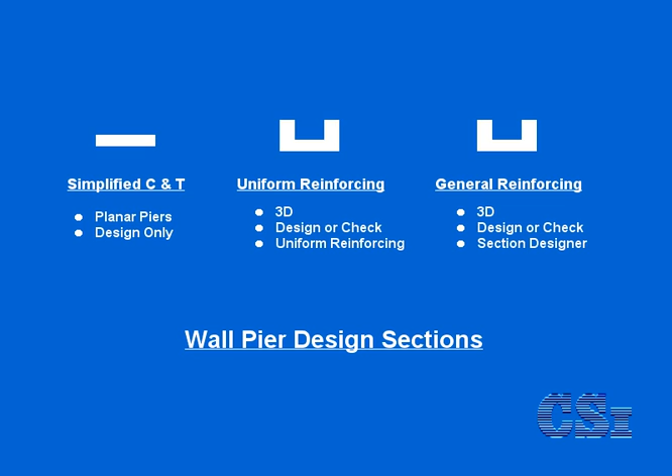This tutorial will illustrate the three types of shear wall design available in ETABS. First is the simplified compression and tension design, which designs planar walls. Next is the uniform reinforcing approach, which can design or check 3D walls using uniform reinforcing patterns. Last is the general reinforcing option, which can design or check 3D walls using arbitrary reinforcing patterns defined in the Section Designer program.

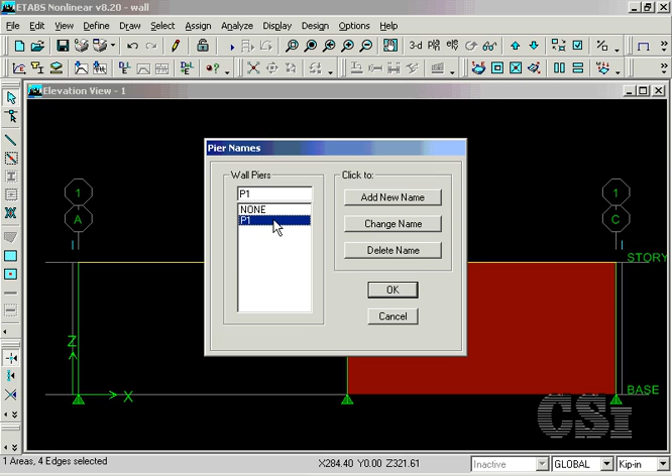The shear wall we will design is 1 story tall and 10 inches thick. However, before a wall can be designed, it must be assigned a pier label. Select the wall and go to the Assign Shell Pier Label command and assign a label. We can now run the analysis.

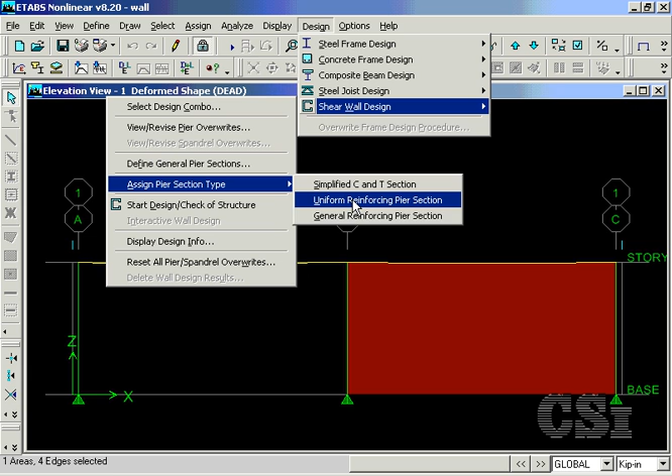With the analysis complete, we are ready to start the design. Select the wall and go to the Design, Shear Wall Design command. Next, go to the Assign Pier Section option. Here is where we select which of the three types of wall designs to assign. We will start with the simplified C&T approach.

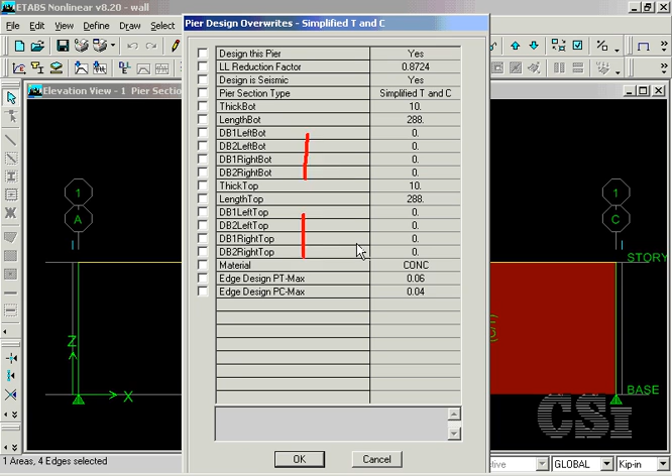Select the wall again and go to the View, Revise Overwrites command to verify our design parameters. Note the T&C is selected, that the wall is 10 inches thick, and if we wanted to, we could define edge members using the DB dimensions at both the left and right sides, top and bottom. We are now ready to start the design.

The required tension reinforcing is displayed on the wall. A right click brings up a detailed design sheet showing flexural, shear, and boundary check information.

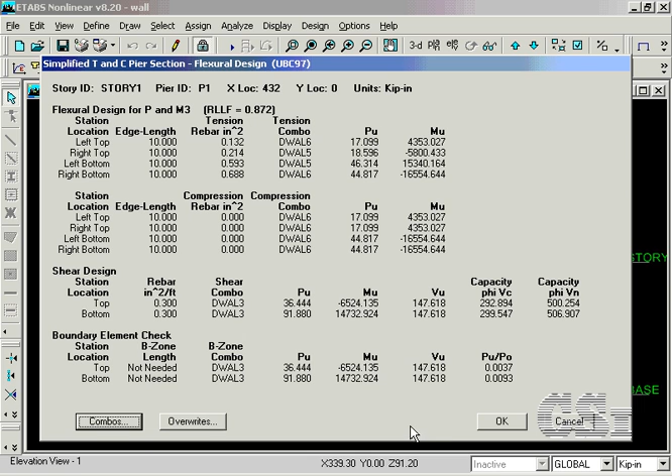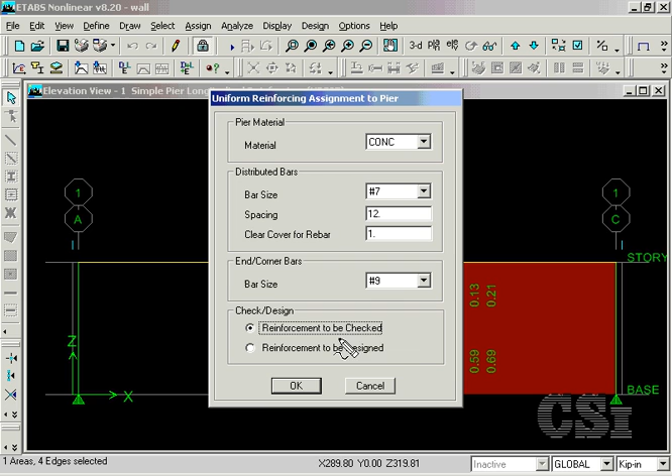Select the wall once more and again go back to the Assign Pier Section command, but this time select the Uniform Reinforcing option. In the edit box, you can specify the uniform reinforcing and the end bars, as well as whether the wall should be checked or designed. We will select the checked option, and the specified reinforcing displays on the wall, including the C in parentheses to denote check.

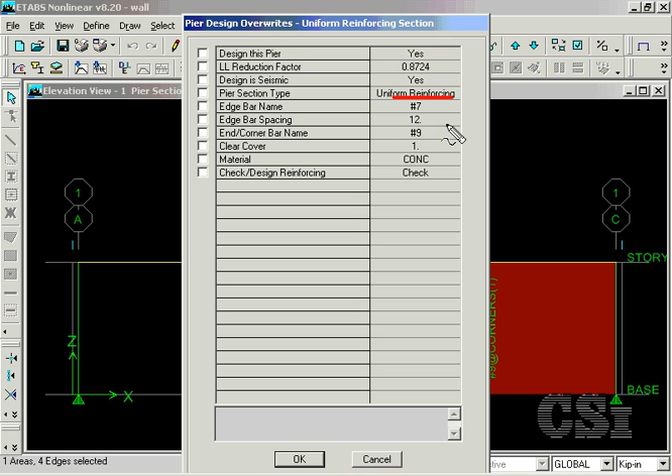If we go back to the View Revise Overwrites command, this time the box displays uniform reinforcing as the type, the reinforcing we selected, and that it is a check. Next, we rerun the Design Check command. This time, when the check is complete, rather than reinforcing, it is the demand capacity ratios that are displayed on the wall. A right click brings up detailed information on the check.

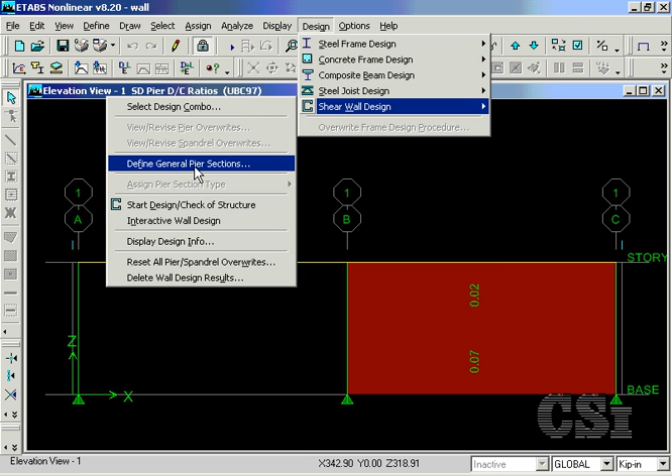Next, we will use the General Reinforcing option. However, prior to assigning this type, we must define the section using Section Designer. This is done through the Define General Pier Sections command. We will add a new pier section, but we will base it on the existing P1 wall pier geometry.

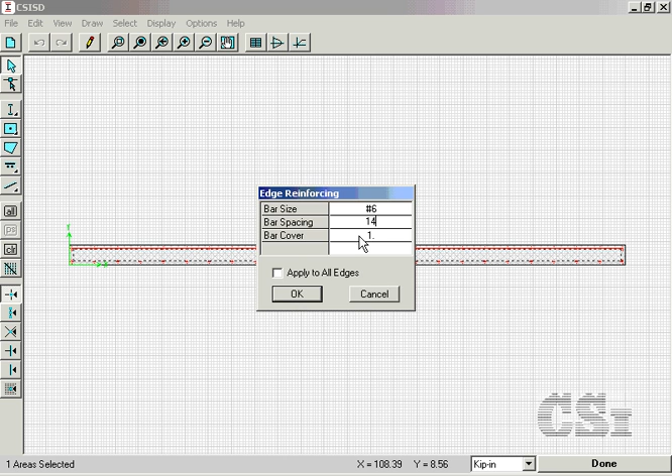Click on the Section Designer button to edit or modify the section, including right-clicking on the reinforcing to bring up an edit box where we can change the size and spacing as needed. When the changes are complete, click on the Done button.

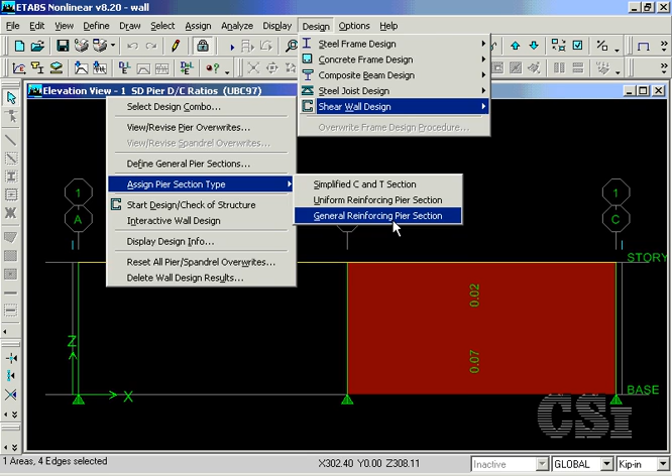Now we can assign the Section Designer section to the wall by selecting the wall and going to the Assign Section Type command and choosing the General Reinforcing option. Highlight the section we defined for both the top and bottom and make sure that the checked option is selected.

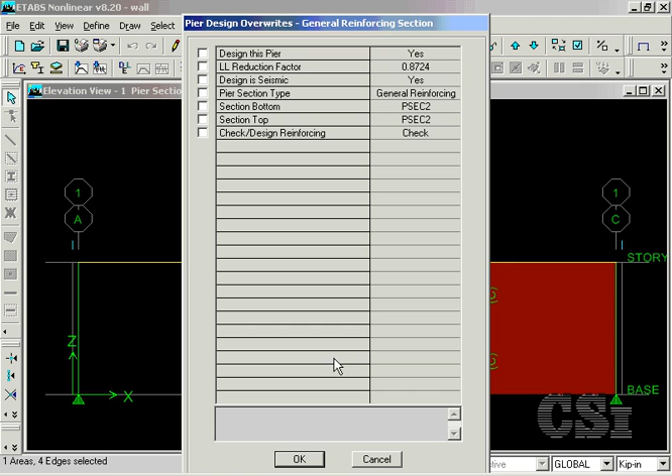If we go back to the View Overwrites command, note how the edit box has changed to reflect our current design choices. Once again, start the check of the wall. Once more, because we are doing a check rather than a design, the program displays the design capacity ratios.

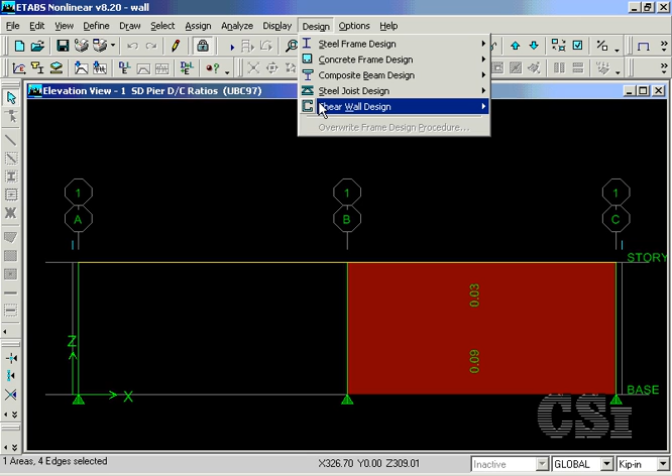As a last step, select the wall and change from check to design for the general reinforcing choice. Note that D is now displayed. Start the design again. And now that the program is doing design, it displays the required reinforcing ratios instead of the design capacity ratios shown in the check mode.

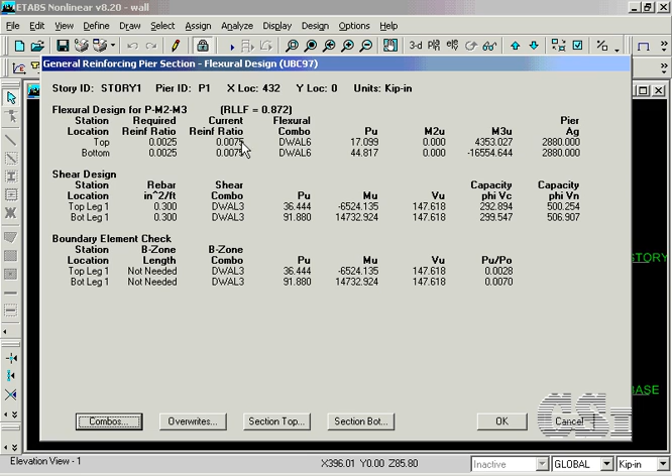This concludes this tutorial.